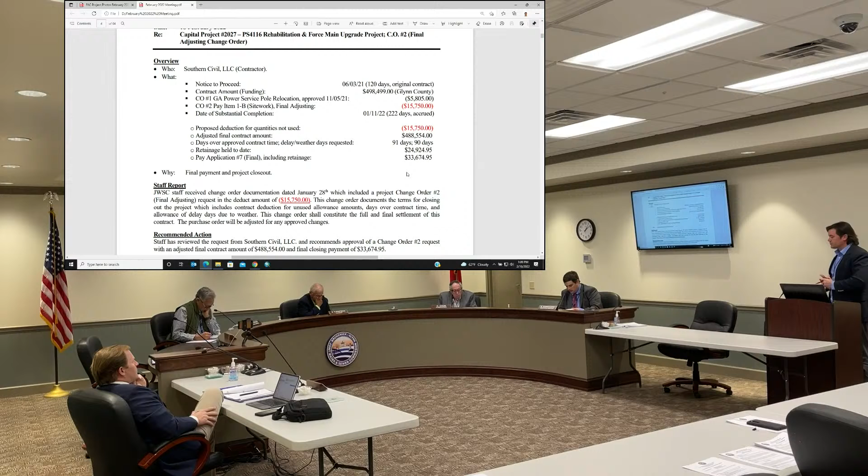And this is a final balance and change order to do that. So we do this so that the money transfers over and gets deducted from the purchase order, and it's the proper way to close these projects out. It also brings these projects back for the commission as well, so they're well aware of how the project ended up financially.

And in this case, we actually have a net deduction at the end of the project. So it's a net deduct, or reducing change order, of $15,750. That's due to a line item of temporary bypassing we did not use in this project. The reason we didn't need to use the temporary bypass is because essentially the new pump station is set right next to the existing one. And then the new force main that this ties into was done by another contractor, a separate project we'll talk about here in a minute.

So the project finished up successfully, and this will close the project out and it will come off the capital project forward. Can I have a motion?

I'll move that the Brunswick-Glynn Joint Water and Sewer Commission Facilities Committee forward the above described change order number 2 to the full commission for approval. Second.

Motion, second. Any questions? I will say this is the one that's funded by Glynn County, and so they are reimbursing us for the cost, and then they're going to actually have to dedicate the improvement to us so that we can depreciate the asset. So there'll be, hopefully at the March meeting, dedication documents for the new pump station once it's all paid out.

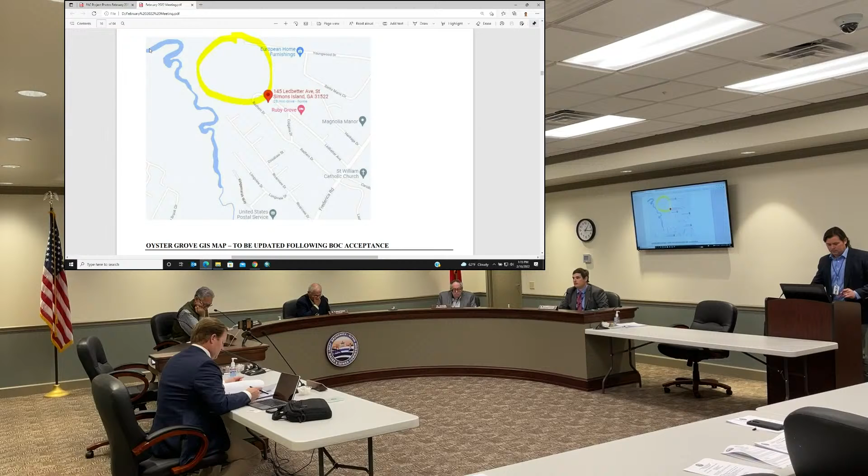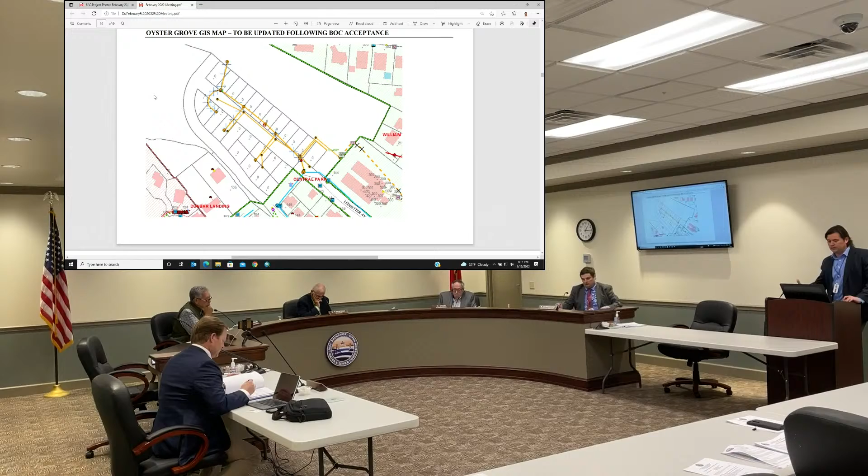So I was going to pull up - this new subdivision is located on the northwest side of Magnolia Manor on St. Simons Island. I can go to GIS if it would help anybody see exactly where this is, or we can just go through the exhibits. There's a GIS snapshot - the lines still shown as orange at this point are the new infrastructure. We hold those as orange until the board accepts them into the public system. Once that happens, the sewer will turn green and the water will turn blue.

And there is also the attached final plat - an item I wanted to point out on that is the location of easements and pump stations.

Here you'll see this square parcel, 50 by 50, where the new pump station is actually located. You'll see associated easements addressed in the memo for routing the sewer to that pump station, and access to that pump station as well. There are a couple more easements noted through here, part of the extensions of future phases of the subdivision. It's going to go that direction. Nothing too unusual.

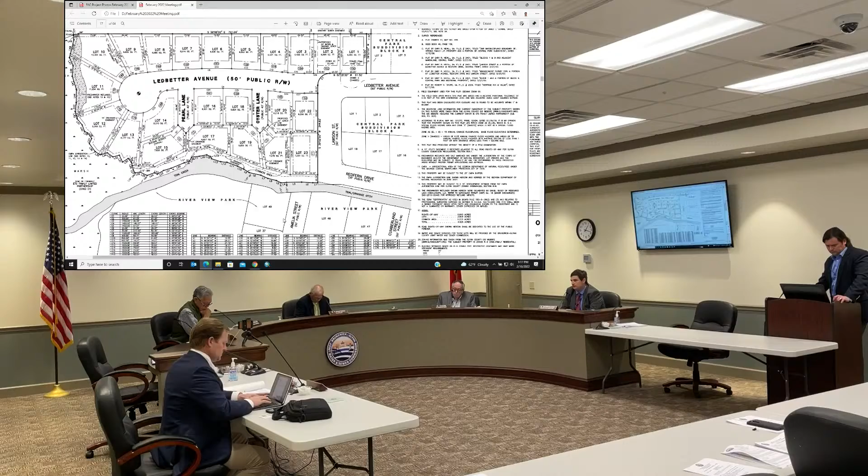Do I have a motion? I'll make the motion the Facilities Committee forward the above described dedication and easement documents to the full commission for approval and acceptance. I'll second the motion.

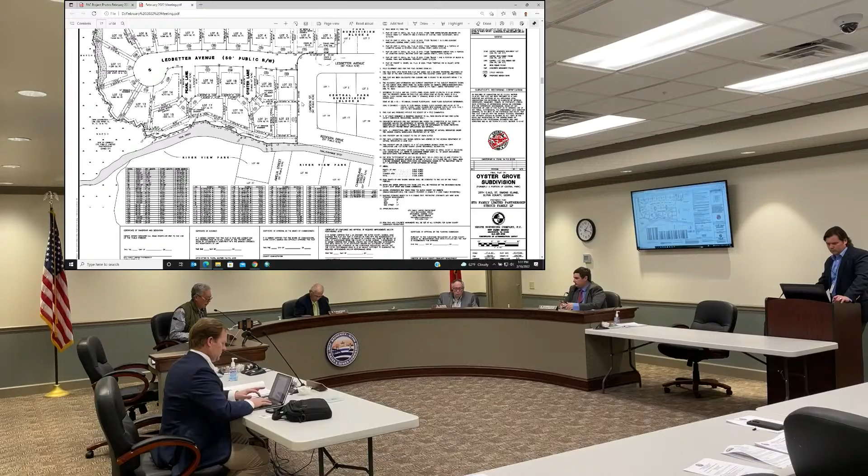What size is the water line? Water line inside of this subdivision is 8 inches. So there's 1,500 feet of 8-inch water line? Should be reflected on, we did detail it in the costing here, but yes, 1,508 feet of 8-inch water line.

Sanitary sewer collection system, and then also the pump station. And the collection system, what size are the sewer lines? Those would be 8-inch sewers. Okay.

And the force main for the pump station? Leaving, I believe, is a 6-inch. 4 or 6-inch, yeah. At 97 gallons a minute, it should only be a 4-inch.

Didn't include the record drawings in here, but I can look with the plats on it included. That pump station is tying into an existing force main. It goes to gravity, correct. It's just off the exhibit sheet here, but it discharges to a gravity main.

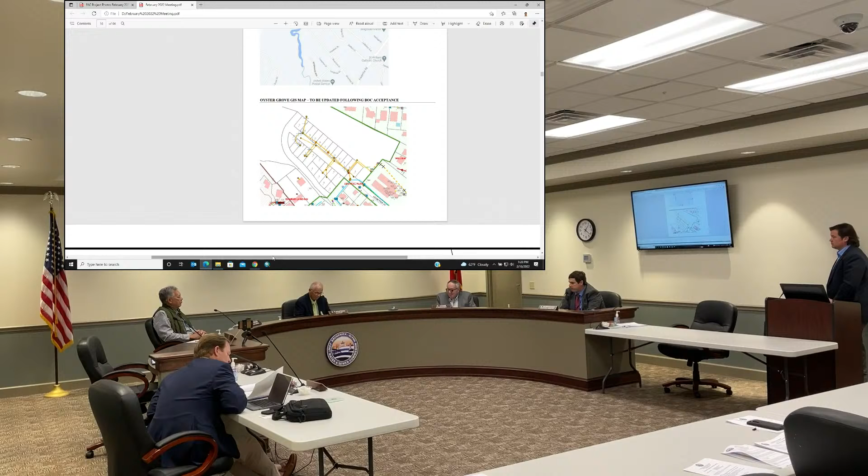Any other questions? Hearing none, all in favor? Motion carries 3-0. Thank you.

Next item is intergovernmental lease agreement with Glynn County, former animal control facility. Ms. Roberts? We'll hold the paperwork over.

Thank you, Mr. Chairman. A little background on this: you may recall the commission granted a request for us to purchase a large number of materials for the meter project, in order to avoid supply chain issues and anticipated pricing increases. As a result, we were looking for additional storage space. In our search, we came across the former animal control facility. I believe it was Mr. Burrows who suggested we look into that. The county was very amenable, saying they'd much rather have somebody in that space than have it remain vacant, so they know maintenance is being done and the facility is kept up. So we enlisted the help of Mr. Dorman and his colleague, Mr. Mumford, to come to terms with an intergovernmental lease for that property.

I will defer to Mr. Dorman for the details of the lease, since we're still working through a couple of details, so I want to make sure we get the latest information. Mr. Dorman, if you'll bring us up to speed. Sure. As you'll notice in the lease agreement, the rent is still left blank. The rent is supposed to be equal to the estimated monthly utility, general maintenance, and carrying costs. Mr. Mumford is still working on that at this time. Hopefully we'll have that before tomorrow's meeting.

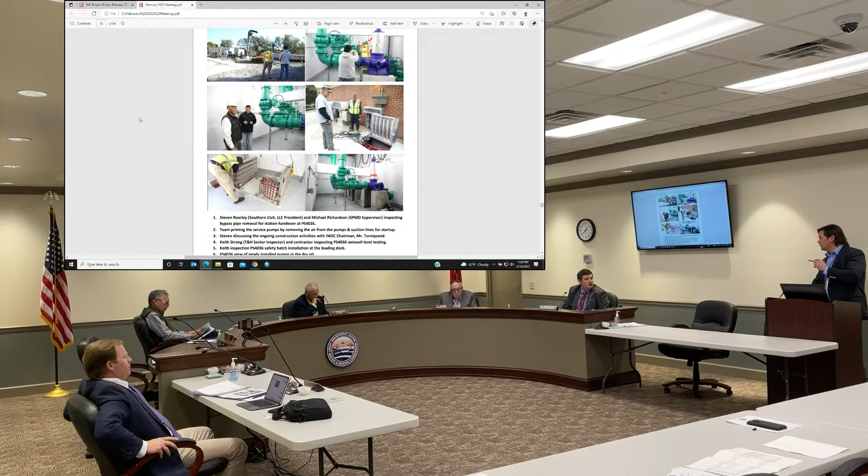Okay, so that was wrapping up. Also, last Thursday we had pump station 4036, the twin almost of this station, off B&W Grade Road, deemed substantially complete. So we had another startup over there.

Those hatches are very heavy, and if the guy lets go of it and you're on the other side of the building, it will scare you. Yeah, they look like they're pretty heavy duty.

How's that? Sounds really similar to a pump coming apart. Yeah, it just sounds like something explodes.

So substantially complete means there's just punch list items that need to be resolved? Correct, there is an industry definition of the term substantially complete. Essentially it means the station is functioning as it was designed, it's doing what it's supposed to, and it's typically handed over for operational reasons to the owner at that point.

Contractor's still involved - in this case as well, they may keep a bypass pump there just in case, to make sure nothing happens for a week or two afterwards. But typically substantially complete means it's 95, 99% there. It should be just minor items to address on the punch list, painting, maybe a hiccup here and there. My simplified version is: can it go overnight without an alarm waking me up? That's the truth.

So our engineer is the one that makes that decision, the engineer of record. Correct, our engineer of record who designed this, they're the ones that verify it was built according to their design, and that it functions appropriately, and then it's ready to be turned over.

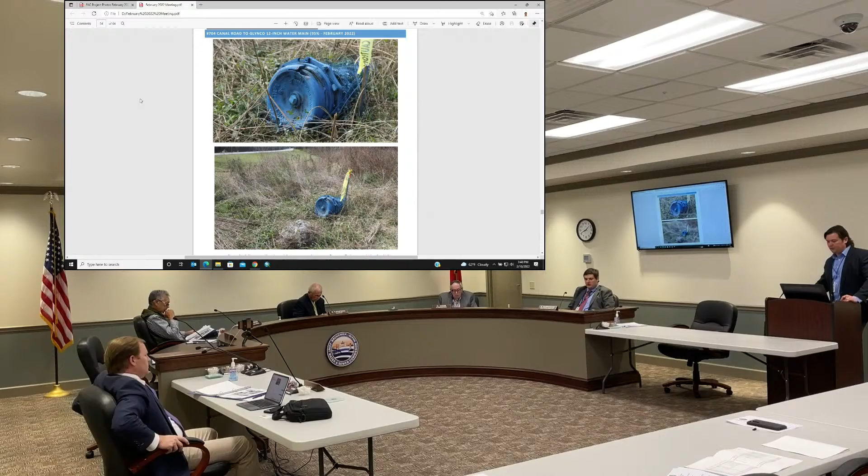You skipped force main. Oh, my bad, oh guys. Pretty big one to skip. Sorry, don't skip a lot of the good things to talk about on it.

702, that's the force main, which is upstream from the stations we just talked about, 36 and 35. The force main is essentially in the ground except for two major bores, two last bores right around the Glynco Parkway, National Guard area. We're just waiting on TV Landmark, our drilling contractor, to get their 100-ton machine here from North Carolina. It's currently on the job, waiting for it to free up. They're doing everything they can otherwise until that big machine gets here. Next week, they're finishing the final tie-ins of the force main segments along the route.

The force main is not tied into the station yet. That's going to be one of the last things that we do before we turn it around.

The water line, I'm happy to say, has been in service. It's complete as far as this project goes. It now connects the canal crossing area down by the storage place on Canal Road, all the way up to Glynco and Harry Dreger's. That loop is now functional and connected. Our customers on Canal are now tied into the new water main.

For the longest time we had a flushing meter on a hydrant at the end of that dead-end 12-inch water main for water quality reasons, to keep the water moving, because the storage place was the only customer down that end and they had water quality issues. Good to go now—they've got redundancy from both directions.

There's development happening all up and down Canal now—expansion to the storage place, a Dollar General going in behind Moondoggies. A lot of stuff happening.

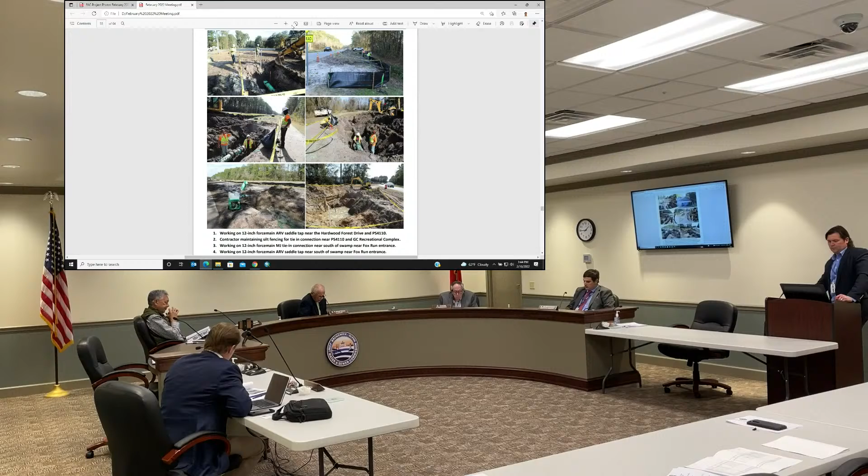Todd, on these photographs I don't see any crushed stone underneath that pipe—do they put it in before they backfill around it? If soil conditions warrant, they're supposed to bed it in stone. But how are they going to do that when it's up like the one on the left? I don't understand how—gravity is most definitely always bedded in rock.

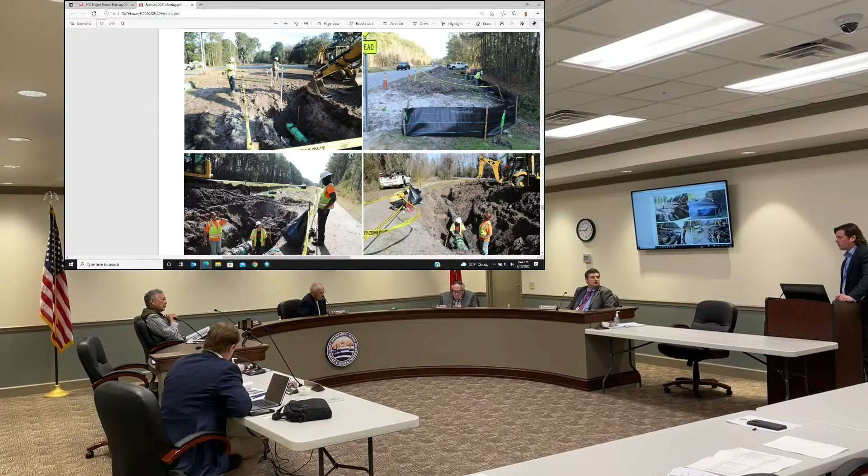If they can de-water it and keep it dry enough, with force main they can typically do that and get it in the ground quicker. They don't always necessarily bed the force main in rock—most certainly if you're trying to maintain a grade, like on gravity, yes.

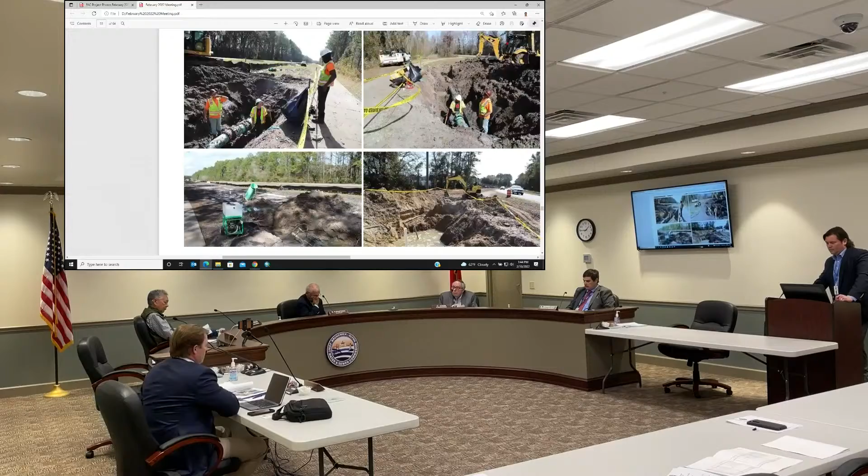Okay, and the water main—this is on Glynco. The stub-out is there, and this picture demonstrates that if you let things sit out too long, sometimes a bush hog gets a hold of it. I think that's what happened to this cap here.

Tie-ins—we're still waiting on in-house forces. Derek's supposed to be out there on that lower section, my understanding is next week. I'll talk to him tomorrow and confirm, but my understanding is next week on the lower section.

He's trying to let it dry up, but we're just going to have to de-water and put the pipe in the ground—it's never going to get any drier than it is right now. Probably not, yeah.

Top left picture is the obviously not completed auger. There will not be pallets stacked up underneath it, that's just temporary support. But the auger, as you see, does not make it all the way to the next structure. The manufacturer, not our contractor, did not quite deliver enough material to get to the new hopper, but working on it.

You get a profile shot of the filters there. We've been waiting on a PLC for filter side number 2, can't be ran right now because of PLC issues. We were notified this morning that the PLC should be here next week, so we're anticipating the filters being back online in 2 weeks with a new startup.

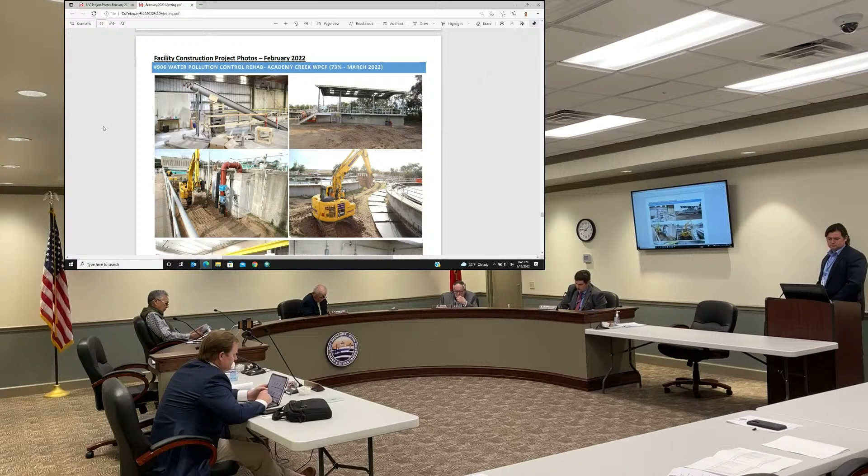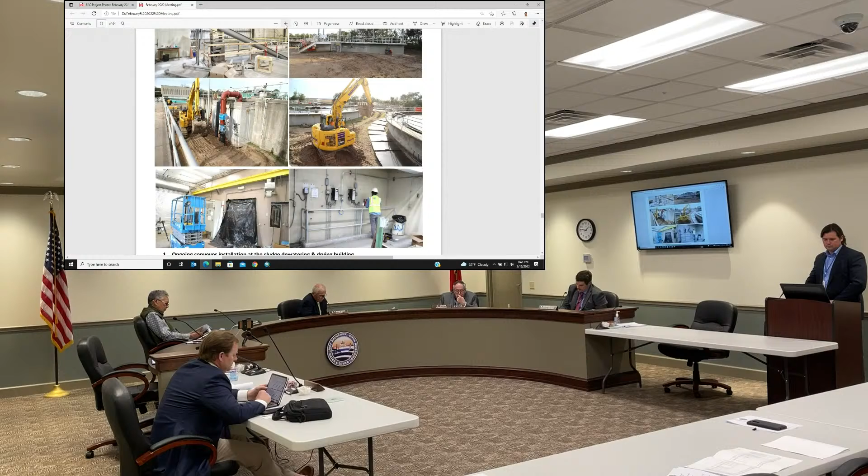Middle left there is one of what the new RAS connections look like. That pipe will be painted, the red iron will be white, and the blue are the valves and flow meters that we have on those lines.

For your information, today, where that excavator is sitting, they are digging because they are making the tie-in on the actual influent connection to that box from the new splitter box. So that area is currently under heavy excavation.

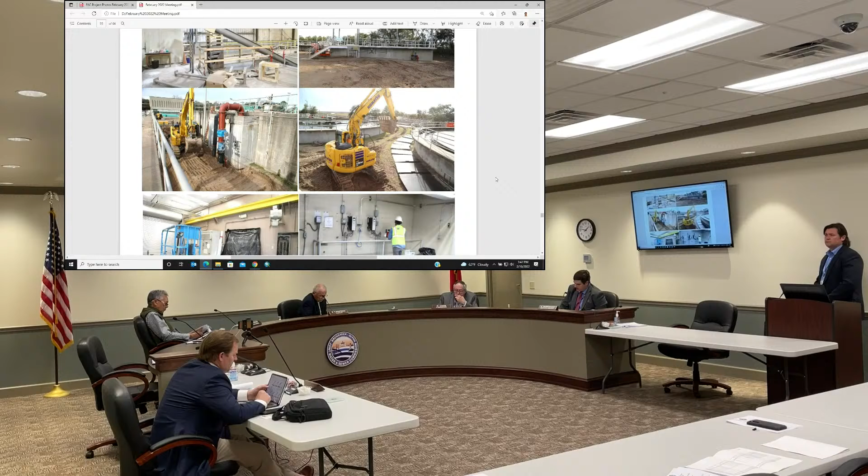And then on the right on the ground, you see those are the panels that go in around the outside of the clarifiers to keep any currents from washing up solids. Those are Stamford Baffles, and we've got those installed in clarifiers 1 and 2, and they are fixing to install them in clarifiers 5 and 6.

Item 5 is ongoing work in the motor control room. We've got 2 new VFDs installed in there, they've got multiple panels in place, new HVAC units. That building's getting a lot of work done to it. And on the right, they're doing some electrical improvements for the RAS pumps between clarifiers 5 and 6.

The new splitter box is operating into aeration basin 1 as of yesterday. So you see one pipe into the splitter box, and there's multiple pipes out. One of those is tied in. They're tying in AB3 today and hopefully AB2 tomorrow. The RAS has been interconnected, and hopefully tomorrow the mixed liquor will be interconnected, and by end of day tomorrow, if everything goes smoothly, we'll actually have one plant instead of 2 plants located right beside one another.

So, the return sludge piping, you said it's gonna be painted white? That's what they've been painting most of the piping. Don't we have color coding for them, they're different? Will paint it whatever the color code is. I guess RAS would be brown. Yeah, okay.

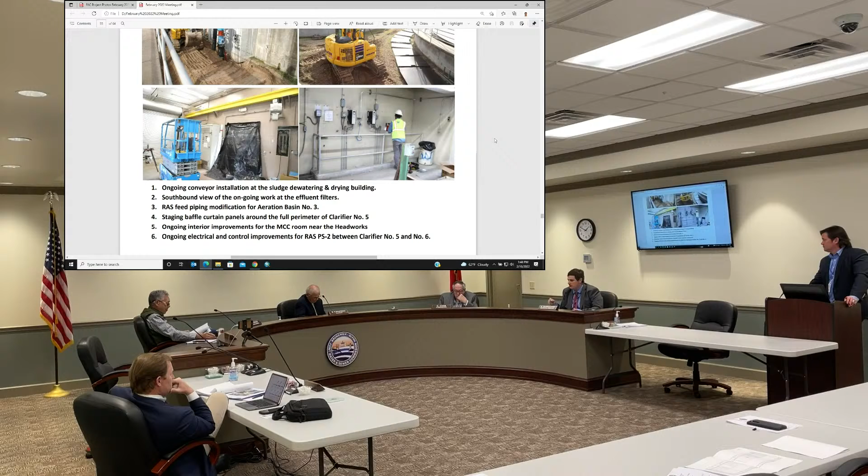And I'm a stickler for stenciling it with the flow direction and labeling what it is as well. So they get all that done.

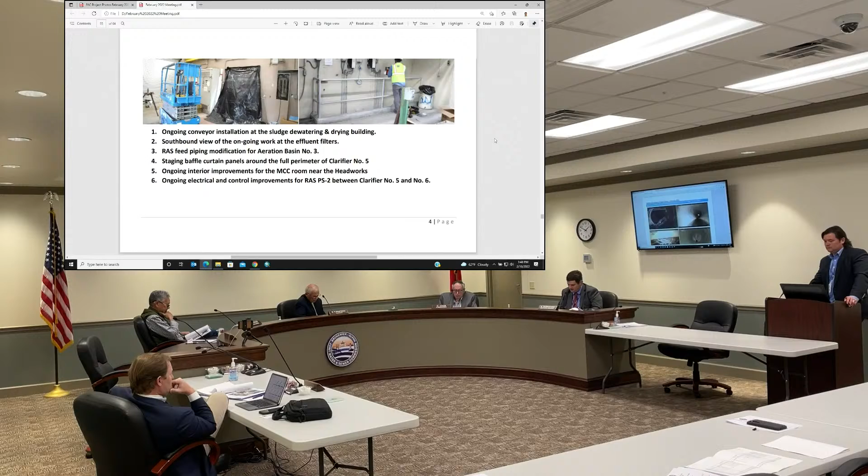And what's the schedule on the bar screens now? Delivery date, until we're told otherwise again, is the last week of March, approximately the 29th is the estimated delivery date. So we'll probably find out on the 27th it's been delayed again, because that's been the habit the previous 3 times. Delivery is in March, and then assuming they show up, we should have the screens operating by mid-May, and then they can finish up the odor control improvements around the screens. They're going to very quickly run out of things to do until the screens show up.

Do we know if the screens are in production cycle? To my knowledge, as of the January meeting we had, they had not begun production on them yet. Apparently they were waiting on some of the gearbox components before they even began production.

We were joking the other day that if we could have got the plans for them, we could have probably welded them ourselves by now. But our contractor shares our frustration because he's ready to be done. Sure, understood, yeah, understood. It's an untenable position, but we don't have a choice. It's the condition of the supply chain that we're in today.

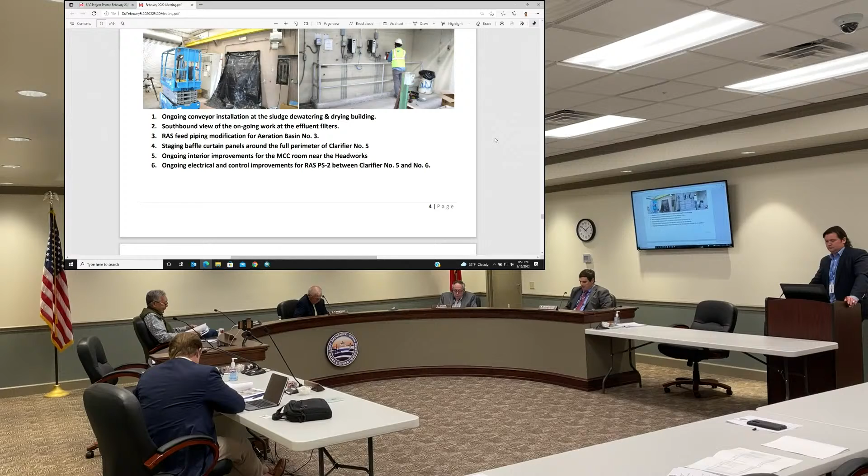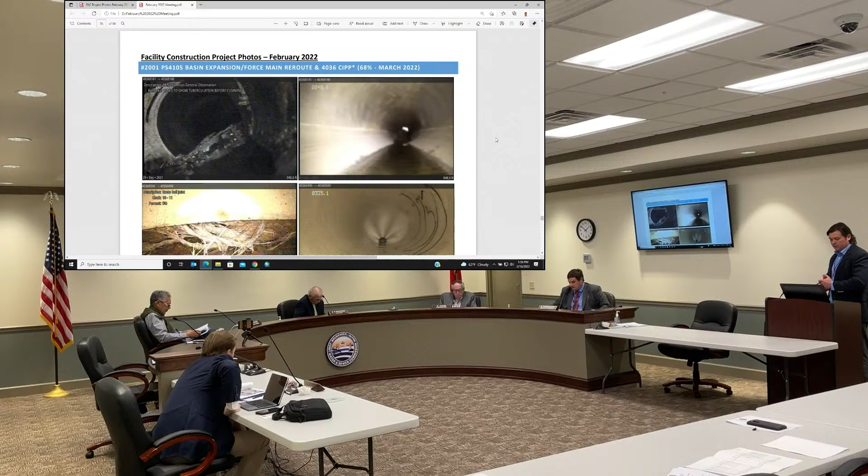Okay, pump station 4105 basin expansion, and this is the 4036 basin CIPP liners. We like sharing these as they're going along. Contractor, these lines have been completed since our last meeting, but now our contractor is just waiting for the contractor at pump station 4036 to demobilize so they can finish the last segments that we included as part of this project. We spoke a little bit about that at last meeting.

And this is just again showing some before and after. These are, when you look at the left and right pictures, that's the same location in the pipe, and you can see how nicely that'll make the new pipe, the new liner inside. Middle pictures, typical roots intrusion, and then again that's the pipe afterwards, the liner. And if you notice on that middle right picture, just a little tidbit of information here, you see some writing, that's the footage of the liner.

Also, if you look, you'll see the spray nozzle. Typically anytime somebody's camming, or a contractor's camming, they're following a jetter nozzle. That jetter nozzle is cleaning that pipe, and the camera follows behind it. It also keeps most of the water ahead of the camera and pulls it out, and there'd be a vac sucking the water out of the manhole as well.

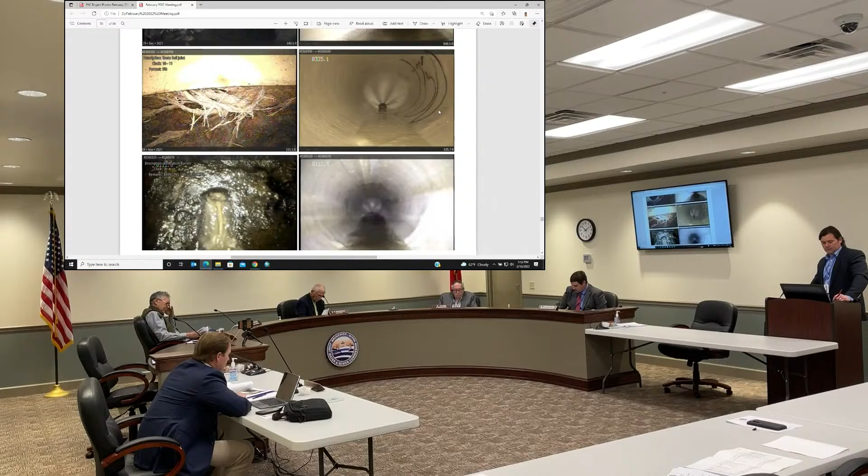Where the roots are on the middle picture on the left, do they cut those out first? They will cut those out. What about them growing back into the new liner? Generally the reason roots are there is because they found a way in, either through a separated joint - those roots sense that nutrient-rich water and go for it - or cracks, that type of thing. If there's no way in, generally roots will grow around the pipe at most, but they can't intrude where there's no opening. And these liners are one continuous pipe all the way through, no joints.

So they can seek success elsewhere - yes, they'll be very disappointed going elsewhere. Generally, once the pipe is cured, the source of nutrients has been eliminated, so the roots will absorb what's left and quit growing into that area since it's no longer nutrient-rich.

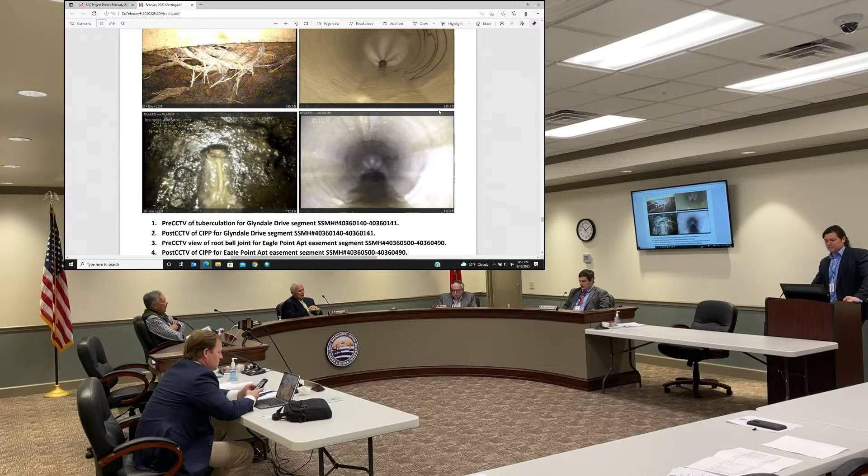Todd, on all of this rehab we're doing, is it being categorized in a new GIS system? Absolutely. We're pulling up the videos of all the existing lines. As far as GIS goes, once a pipe is lined, that's noted in GIS that it's now lined, and it also resets the risk of failure numbers we use.

Does the carrier pipe for the lining - do we still know it from the old videos? Right, it'll still be listed as, say, a 24-inch VCP, but it'll just say lined, and the line date was February 1st. And we'll have a video from the line date, so 10 years from now we can pull it up if we're having problems and just see. We've got so much storage these days, we'll have videos for it.

I would imagine. Yeah, so the bottom picture on the left - that is not my wife's coffee leaking through the pipe.

She likes cream in her coffee. That is sand leaking through a hole, and that's never a good sign because the sand is coming from somewhere. Sand is a scary thing in a sewer line - we like sand to stay where it's supposed to be, underneath roadways and people's yards. So when you see the sand milking in like that, it means there's a void being created somewhere outside of the pipe.

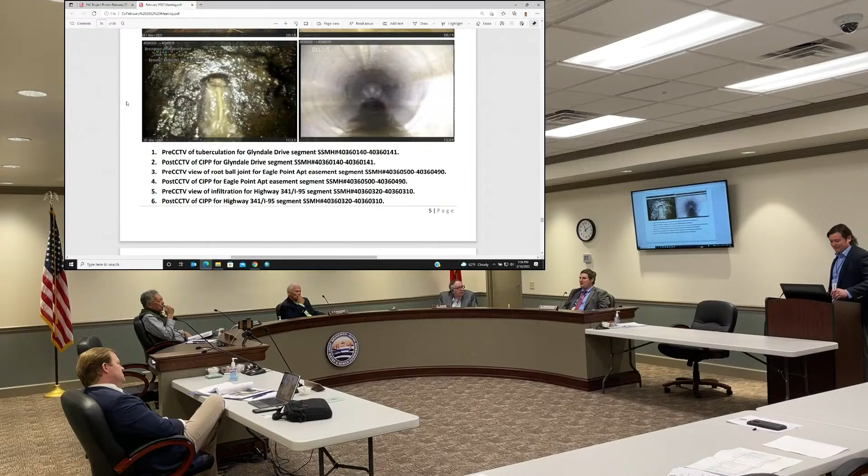Rather than ending up having to go in there and dig down, these lines in Sea Palms West are 16, 18 feet deep. We're okay with some slight imperfections in the perfect circle of the pipe as long as the pipe's still flowing in these circumstances, because we got some quotes for bursting one of these sections. A 300-foot section was going to be almost $300,000 to pipe burst this thing.

When was Sea Palms West constructed? Mid-'80s? 72, okay, 71, 72, 73. And most of the lines ductile iron, or are they just ductile iron when they're real deep? The deep ones, that used to be the standard, pretty much. The deep trunks are, I think anything over 12 foot, I think it might have been at the time, was ductile, was what was specified.

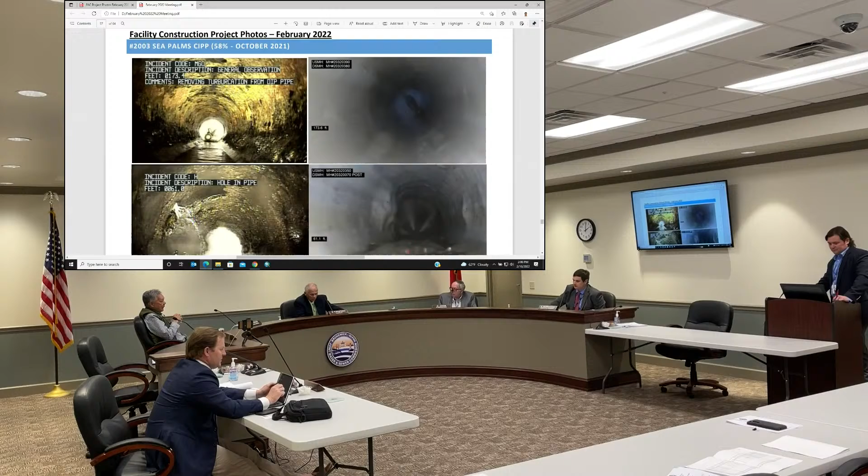When that was developed years ago, I was early when I worked for Georgia Power, and it was very swampy at the time. In some places, when we had a full moon tide, the dirt roads in there flooded. That was during the construction, summer of '73.

So it was a huge challenge to build that facility, particularly burying lines of 12 to 18 feet. I think we have one that's 20 feet right near Frederica Road. It was just a choice made at the time, instead of having pump stations, to go very deep. And it was a big deal to go that deep.

I don't know that it's the deepest neighborhood sewer on the island, but it might be, probably. I mean there's some deeper lines at the plant obviously, but other than that, it's as deep as it gets out there. Yeah, it's a good one. Very good project, much needed.

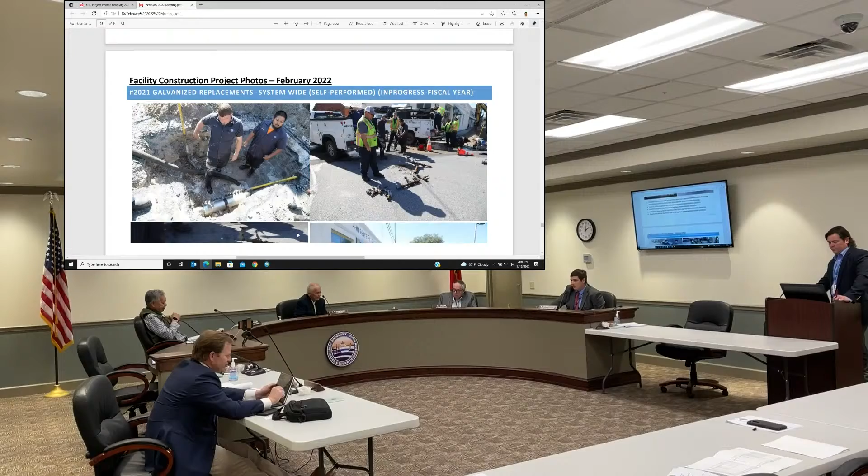The galvanized project, those guys are constantly working on that. You can see some more examples of the materials they're pulling out of the ground, replacing with modern materials. One of these in the bottom right was taken just down the road here, Mortgage Cleaners, right in front of the cleaners there. A little bit at a time, getting that galvanized out of the ground. I've got some great examples, I meant to bring one, the cross sections of galvanized pipe, the tuberculation inside. It's pretty interesting to look at.

At the next meeting, can you give us a chart that tells us the amount of galvanized line we've replaced since we started this project, and how much we did last year, the year before, and per year? Sure, I've got all that. We've got about 1.8 miles replaced so far. And how many do we have to replace? According to GIS, it's only about 10 miles. According to water distribution, it's 35 miles.

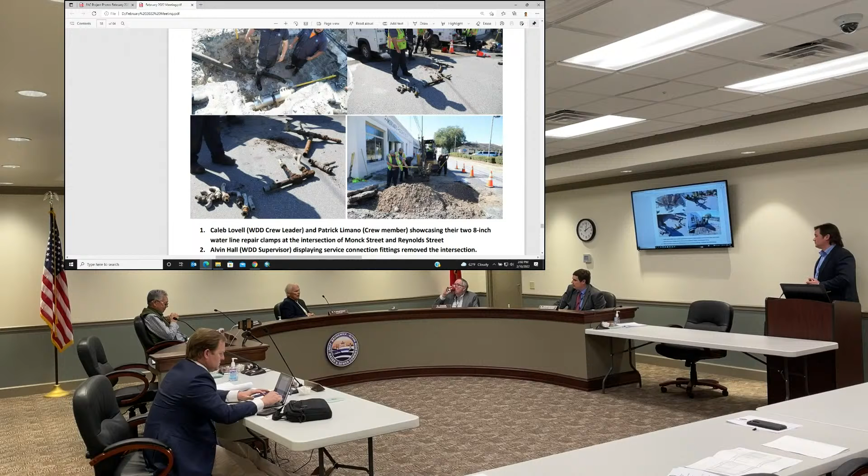Now on the sewer rehab, can we also know the linear feet that we've lined for last year and this year? Absolutely, sure.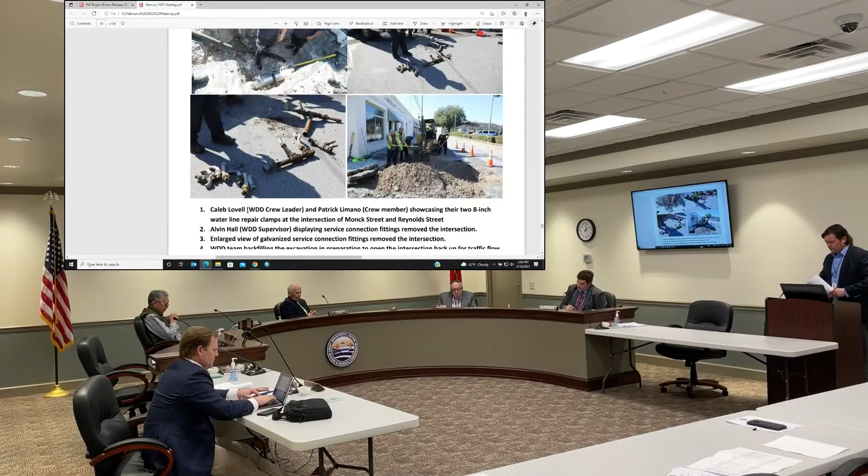Okay, and meter replacements - Ms. Roberts spoke a little bit about this before, and it covers some pictures here, but it's some good shots. The crews out there with M&E putting in the new installs, and they modify the existing lids in some cases to put their antennas. I'm amazed at how many they knock out a day, honestly. We do about 75 installs a day. That's a lot, pretty staggering progress.

So we're up over 6,000 now. Yeah, 6,000 is a good round number because it's 20% of the system. And is it consistently the same crew doing them? They've got 4 crews doing it. Really, wow. I hope it's the fully accessible ones and not the tough ones. That's going away.

Okay, priority basin clean and CCTV - again this is what systems pumping and maintenance, the cleaning crews and CCTV crews do to go out and assess the system. And this tees up for the next round of lining projects. We're out there hunting for the most dire situations, 4s and 5s, that type of thing, that are gonna get grouped into the next batch of lines.

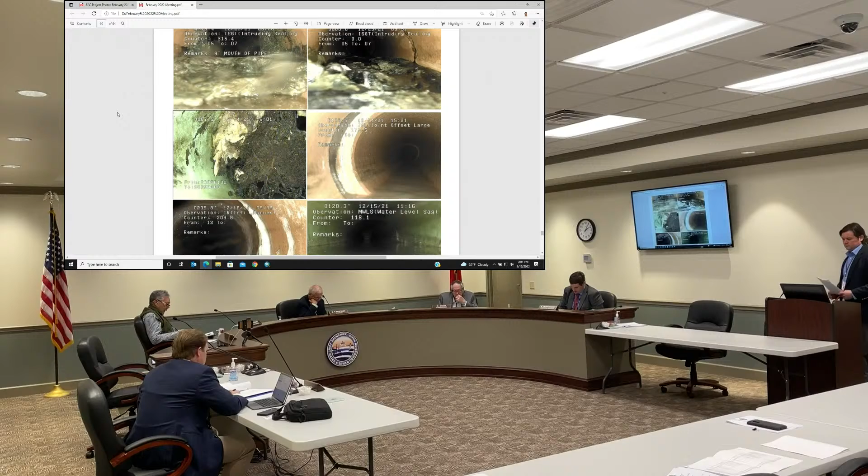That's Suburban Drive right there by the sign, north of Sonic, eye doctor. And in 2005, that's down there - what's that neighborhood called? Devonwood or whatever it is in there. 2008 Shore Rush Trail, that's up there near Black Banks. I had a pump station, 2008's in Black Banks, so that one I can remember.

Okay, and that's the end of the picture report. As normal, we've included the project detail in the spreadsheet, and then also at the very end, our Gantt chart of schedules and the EVA.

Combined progress, no pictures on this, but we did have a kickoff meeting for the Dunbar Rehab last Tuesday. Survey is supposed to begin this week. We met on site - that's a design build, so contractor, engineer, and us all at the same time. Spent a good two hours out there going through wants and changes needed so we can get this 30% taken care of and get a GMP. That's due mid-May, so we should have the total price for the upgrades by mid-May. And of course we should be getting indications of that along the way. So surveying and soil borings are supposed to occur this week.

That's good. Do we know anything about DOT work that may impact the entrance from Sea Island Road? No sir, that section from Sea Island Road is not Georgia DOT, that's county. Understood, but the Dunbar bridge.